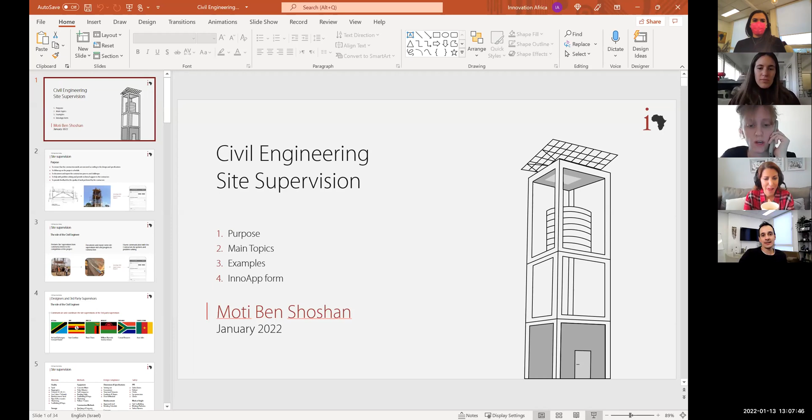Great, all right, so it's good, right? Can I just have one second, just one small fix.

Okay, so we will go through the purpose of the site supervision, main topics, examples, and then we will go through the InnoApp form.

The purpose of the site supervision is very important. It may seem obvious, but long ago Innovation Africa didn't have in-house engineers, and contractors were basically building things as they go, give or take. Now we have civil engineers and supervisors, and the purpose is to ensure that construction works are executed according to the design and specifications. We have requirements for how we want buildings done, and we need to make sure contractors are following it. Of course, we need to check that contractors are following the schedule, which is very important because we need to complete a lot of projects in one year. Another very important thing is to document.

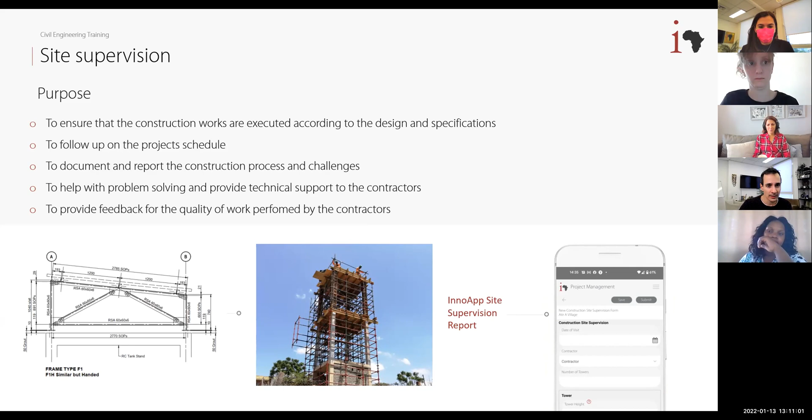So the role of the civil engineer or site supervisor is to perform site supervision from the commencement to the completion of the project, from the moment the contractor starts work on field until the end of project completion. As we said, document and report everything, and have fluid communication with the contractors for updates and problem solving.

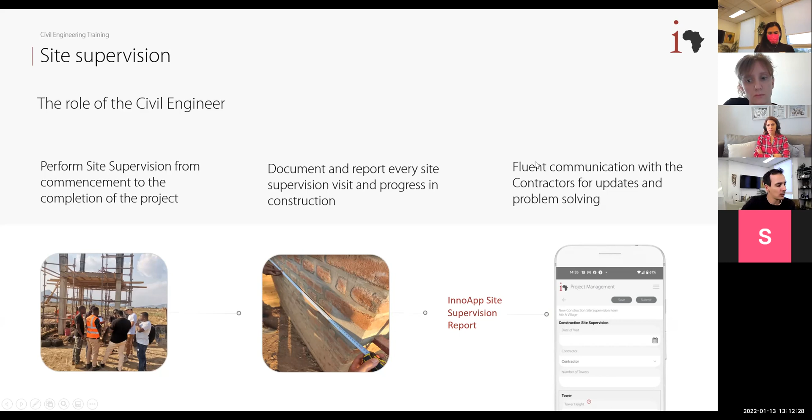This fluent communication is very important, because our team cannot be on site 100% of the time. We're not staying with the contractor all day long—we visit sites maybe once a week. But that doesn't mean we can't keep in touch. If we're not on the field, we can still call them, ask what they're doing today, how things are going, make sure they're working. We can also use our trainees to do it—take their number, call them, ask if they worked today, what was happening on site, and so on.

Another task is to coordinate and communicate with the third-party supervision. Our Ivan, Brian Chuto, Conrad, Jean Jules, all these people need to know when they come to the site, when the critical stages are, when they're going to be ready, and our team needs to prepare the contractor for the site supervision of the third-party consultants.

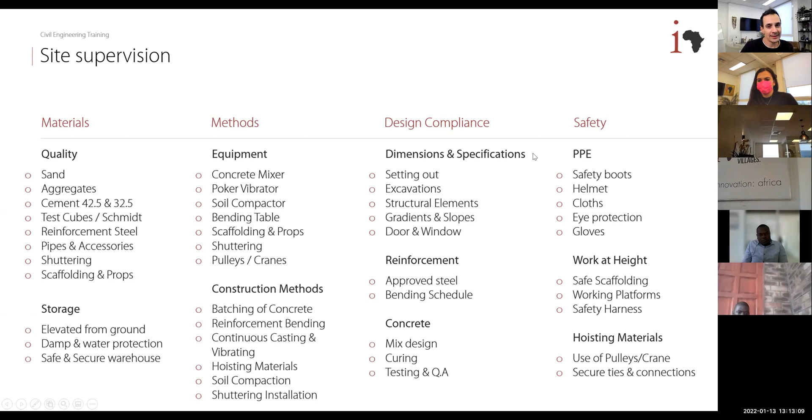This slide is very important. I recommend our civil engineers take a print screen, as it summarizes in bullet points the major topics we need to check and be aware of during site supervision. We have the materials topic: quality of materials, aggregates, cement, reinforcement steel, and storage, which we talked about earlier. The methods topic covers the methods of work, whether they're using the concrete mixer, the poker vibrator, and so on. Design compliance means making sure they work according to specification and our designs. And safety means checking that our trainees use PPE equipment, work at height properly, as Shalom mentioned before, and so on.

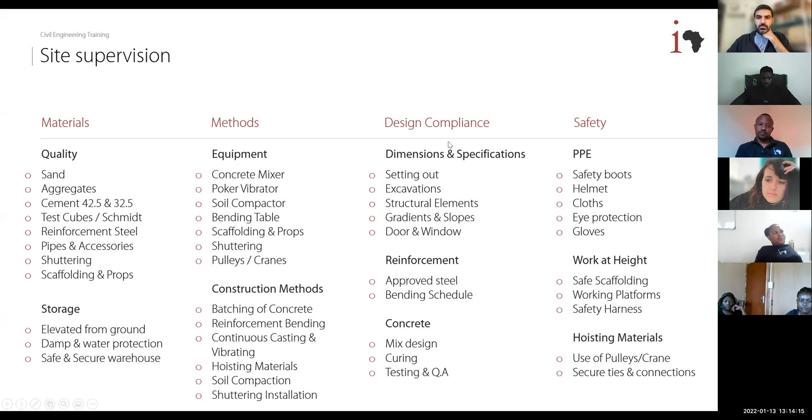The last topic, not shown here but in the next slide, is the schedule. It's also a very important aspect we need to be aware of. On the right hand side we see an example of a schedule submitted by a contractor in Biwi. Our team needs to know what is planned ahead to make sure the contractor is on track.

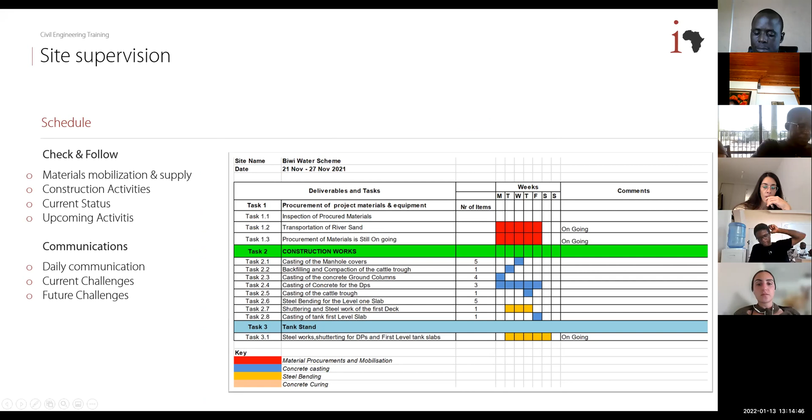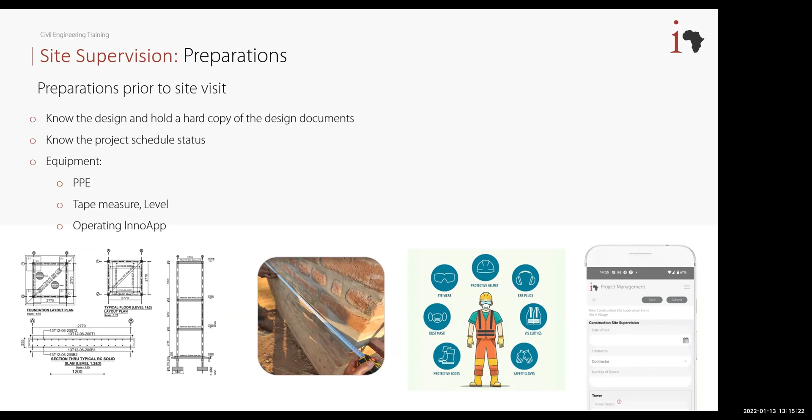Another point I want to mention is based on visits we had where I went to the site with our teams, and we've discussed this a lot in the past, but I want to mention it again. Our teams come out of their office from the central city where they stay - whether it's Mbale or another city - and drive 2 or 3 hours to the village to do site supervision. You make a lot of effort to get there.

So we need to make sure we are prepared when we go to the site. Preparations prior to the site visit: make sure you know the design and have a hard copy of the design documents, so if needed, when you're in the field, you can open the drawing, check the specification, and provide answers.

Know the project schedule status. So if I went to the site this week and saw they're working on foundations, when I go to the same site in two weeks or the next week, I need to know what to expect - are they doing the stub columns, are they doing the slab floor?

And of course, bring the equipment you need - PPE, tape measure, level - and be prepared with the InnoApp, because when you go to the field you probably don't have the best internet connection. So maybe at the beginning of each day, make sure the app is synchronized and everything is ready to be used on the field.

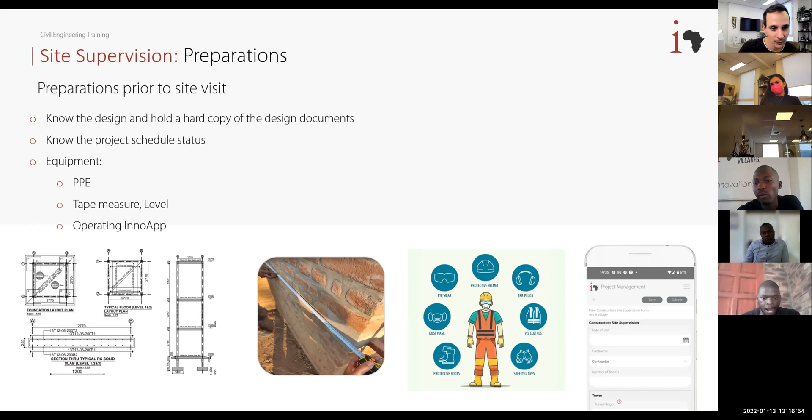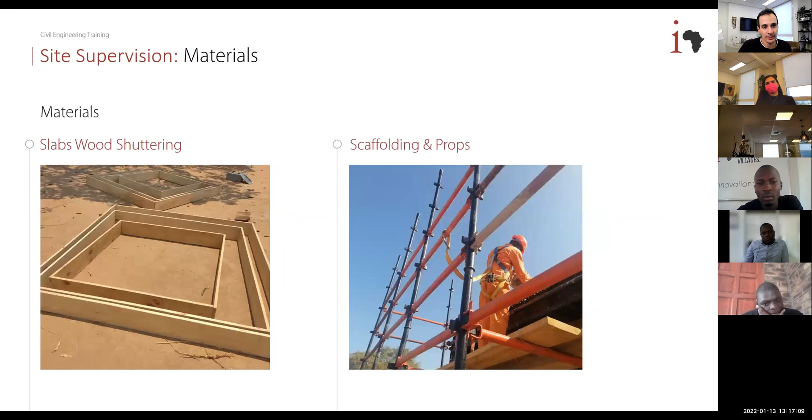We've gone through these slides already, so I'll skip through to make sure the materials are clean, pure, and well stored. We talked about the equipment and the methods of work already. The mix design - most of you know we have a specific mix design for how to create and mix our concrete, so please remind yourselves of our mixture design. See page 17 in the construction manual for further details - all the recipe we have for our concrete - and make sure you know what to expect when the contractor is mixing concrete on site.

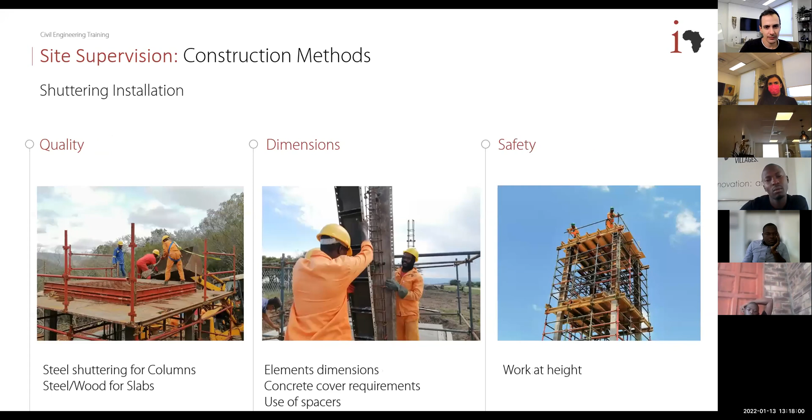We talked about the bending schedule in Shalom's video. Now for safety - you can see they are lifting the solar panels in a way that will not harm the equipment, and it's safe work. This is a good example of hoisting material.

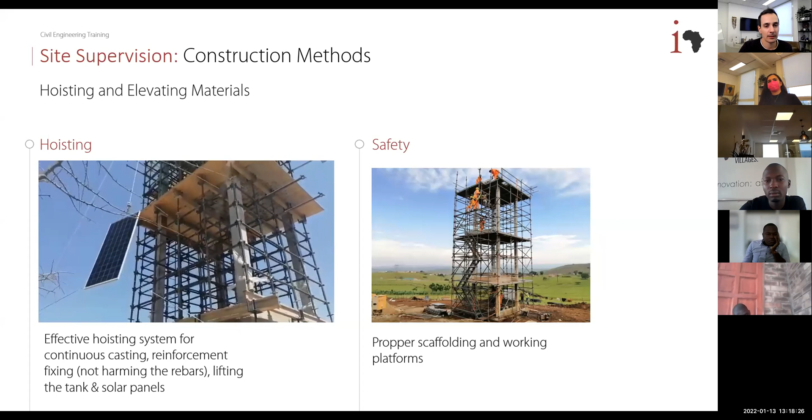We talked about the brickworks and the plastering. All those slides I'm running through are things that we need to check when we go on site. Of course, the curing that we talked a lot about.

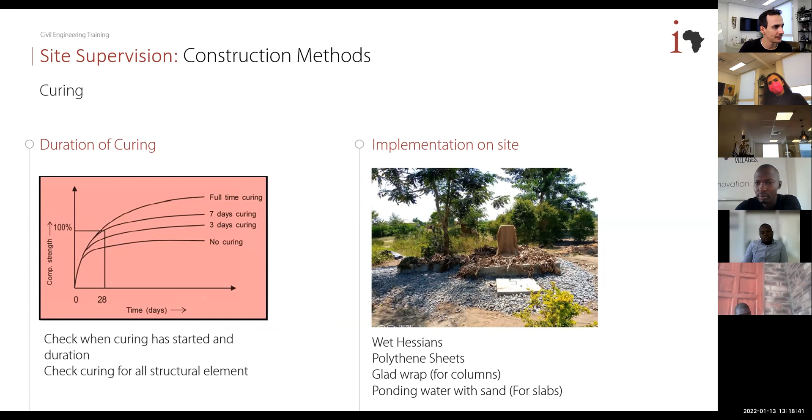Now we are going into some examples. I will stay on these slides. We're going to see actual things that we need to check. I must say it's not everything, it's some of the things that we need to check, but they are very important.

So most of our structures, the first thing that we need to check are general dimensions. If I'm seeing columns, use the tape measure to see that the columns are 23 centimeters by 23 centimeters. This is the most popular dimension that we use in our designs. I think only in one or two countries are we doing 25 by 25, but those are the dimensions. Once you do it a lot, you will already know what you expect to see, you don't even need to open the drawings, you know the dimensions of your columns. Use the bubble level to check the verticality of the columns, if they are straight.

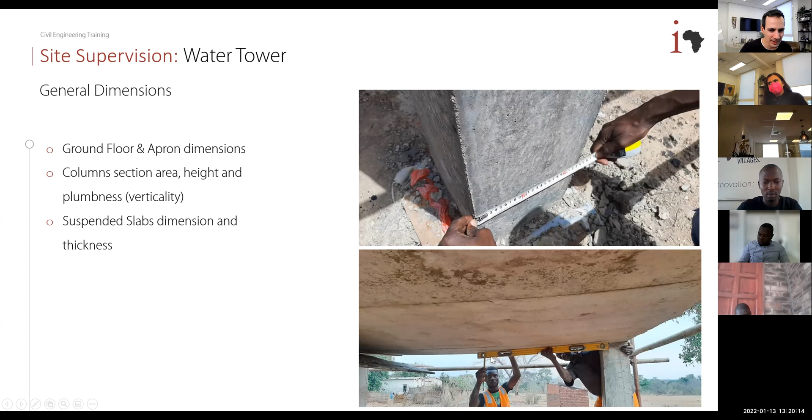Check the thickness of the slabs and so on. Here in the bottom picture from Zambia, we are seeing that the slab is bent, has some kind of belly, and our engineer checked if the slope is okay or it's very severe, and he used the level here.

The new thing that we discussed are the drainage slopes for the slabs, to make sure that the water is not standing on our slabs. So check if the contractor is implementing those things. Pipe clamping.

This thing is always reoccurring. The pipes coming out from the tank, a lot of times they are just connected in 2 points, once on the tank and another point on the ground. And then when you come and just play around with the pipe a little bit, shaking it, it's all shaky. So imagine what happens with high winds, or just kids playing with the pipes, they can easily take it out. So we need to make sure the contractor is clamping and fixing the pipes to the structure. They use clamps, drill holes, connect it to the slabs or to the column, make sure the pipes are fixed and not moving and wobbling.

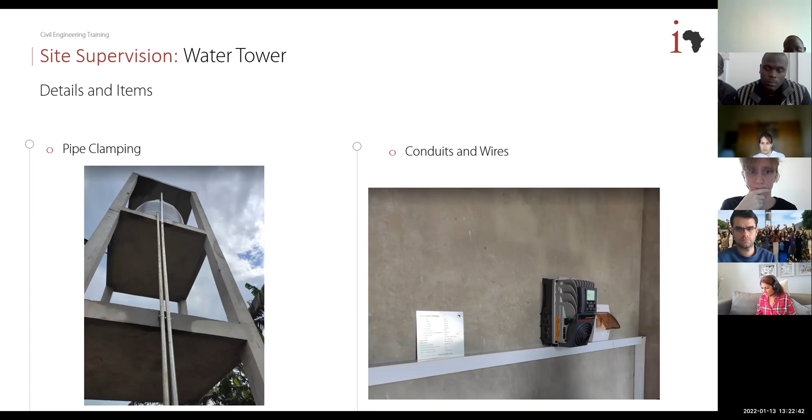Another thing is the conduits and wires. See in this picture how beautifully the conduits are running inside the pump room. No exposed wires, no exposed electricity, everything is neat and nice. Another important thing: if we need to run wires or pipes from our electrical appliances and water systems, we are not doing it through structural elements. Structural elements are columns, beams, and slabs - those elements hold the structure together. We don't want to drill through them. The only place we can drill to run systems is through the brick wall.

The doors and windows, Shalom already mentioned. I saw a lot of places where you stand and the door and window looks like they're painted really nice. But if you climb or take a chair, you will see that on the top and on hidden places, the paint is not complete and there are some stains of rust. So please make sure that on the handover of the project, when they are doing the painting of the door and window, everything is covered perfectly, because one stain now will grow to a lot of rust in a matter of 1 or 2 years.

Another item that we need to check is the locks and cabinets - see that they are working, that they are safe, and they are fulfilling their function.

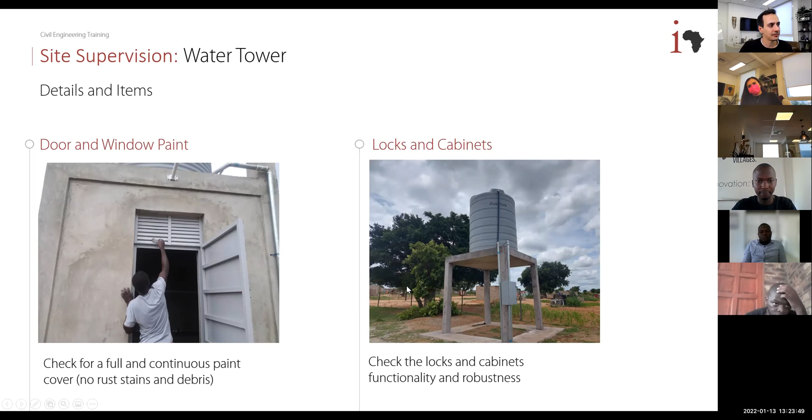I'm really running through these slides because I want to have some time to go through the innovation app.

Important thing with the taps - I know that in a lot of countries we discuss this issue. Our drainage channels need to drain water, right? So we need to make sure they are sloped, that the water will flow with gravity to the soak pit. And it's not always the case - a lot of times you see water ponding into the soak pit, into the tap stand.

So in the new design, we are specifying the direction of the slopes - the water should flow from the surface through the channels to the soak pit. When you go on site, use the level to check that the slopes are correct. The Uganda team can tell you that we did this a lot in Uganda, checking all the slopes, and we saw that in some cases the contractors were not even aware of this issue. It seems like a small issue, but it's very important also for the sustainability of the structure.

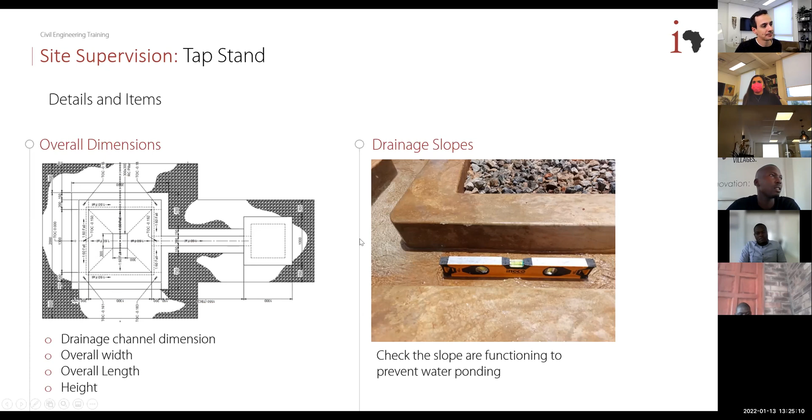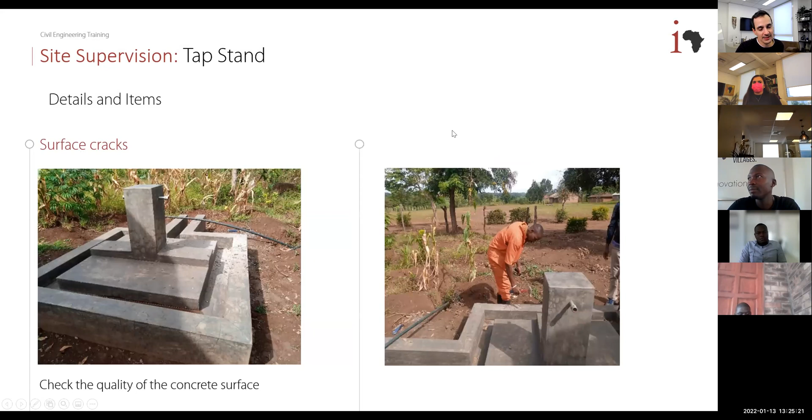We talked about the metal screen and the aggregates. Surface cracks, we talked about it with the curing.

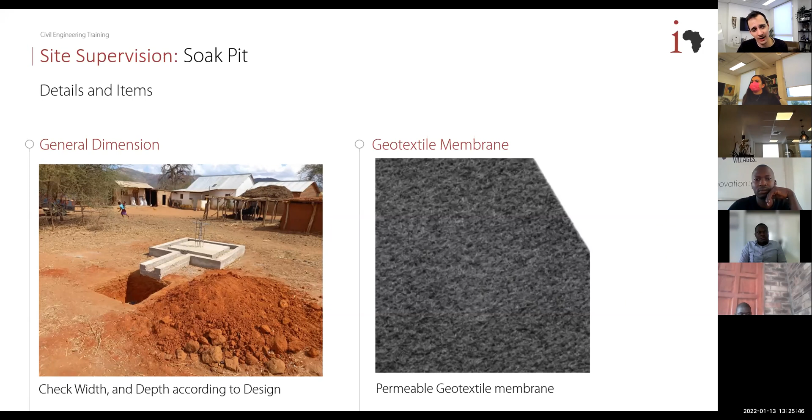Okay, so for the soak pit, again, if you have the chance to see the excavations, check the general dimensions to see that the width is 1 meter by 1 meter, the depth is at least 1 meter. See if they are using the geotextile membrane, because once they are covering the soak pit, it's very hard to tell and to know what was actually done.

We have the concrete cover. Make sure that you have 2 metal handles casted in, and the cover is overlapping and covering the whole area.

Same for the cattle trough. This is a beautiful picture of cattle trough. Look at the nice finish, the smooth finish of the concrete, the well done reinforced slab. Make sure that they have these openings in the center wall, so water can flow from one chamber to another.

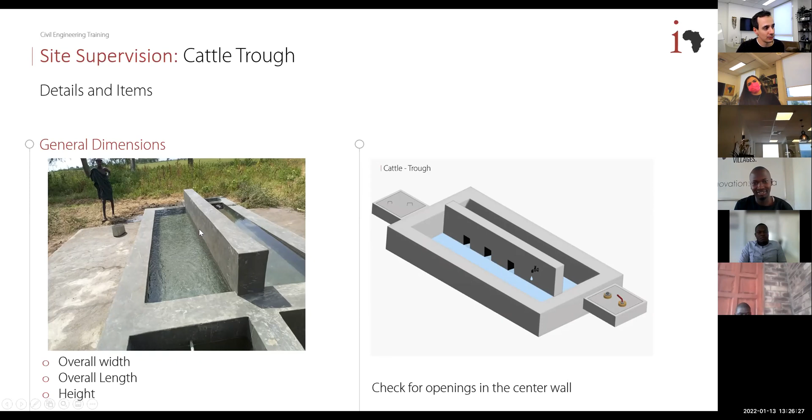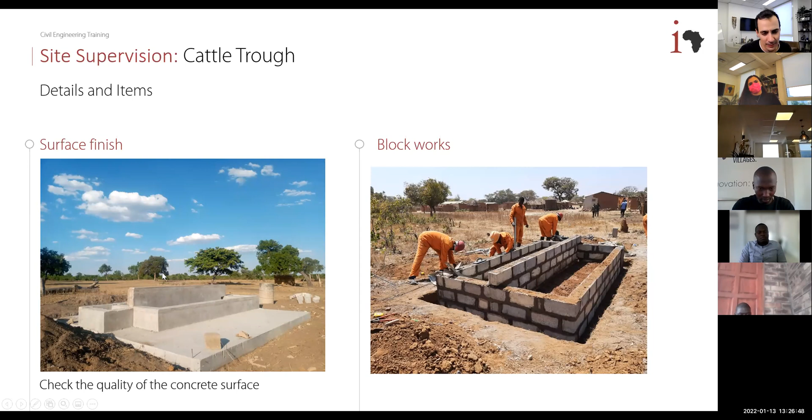And of course, if you see cattle trough in construction, so if you see the block works, you can check the quality of the block works. And if you see the finishes, same thing. Check the finishes of the concrete, check that the curing is being done properly.

Okay, we ran through the site supervision really quick. Now I want to show you the innovation app form. I don't think that they have questions.

Yeah, Raymond is asking a question. Raymond from Malawi is asking about clarification for drilling through block works and not through concrete. When we want to clamp the GI, we need to drill through concrete.

Yes, of course. Clamping the pipes is through the structural elements, but this is really small drills for bolts, just for clamping. And we also drill into the columns when we are putting the guardrails for the tank slab. It's the same drillings. It's not affecting the structural elements so much. What I mean is to drill big holes to run pipes through it. So we saw projects where pipes were drilled, were run through beams or through slabs. First of all, it weakens the slab or the beam. Second of all, water can come in gradually through this drill, and then damage the reinforcement steel and damage the structural element. Hope that helped.

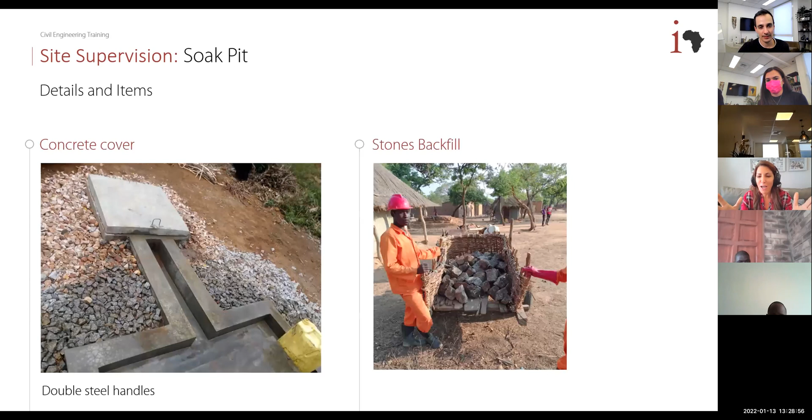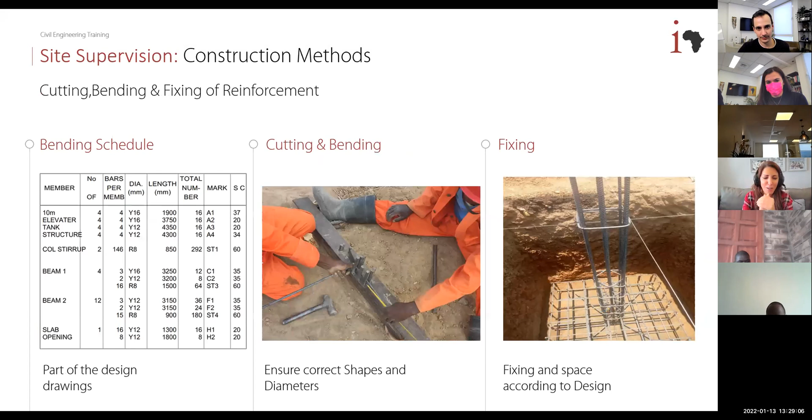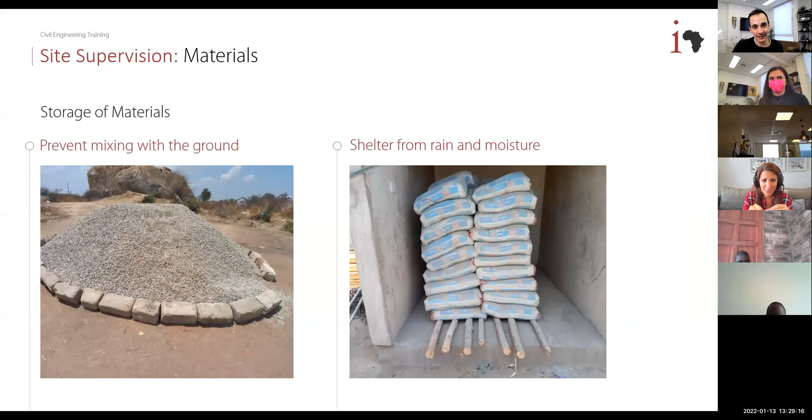Yes. Is it sand, cement, aggregate? Can you teach me how it works specifically when it comes to the concrete mixer of 400 liter, which is what we're asking our contractors to use, those kind of large concrete mixer. Can you tell me how does it work? Yes, so of course, the components of concrete are sand, aggregate, cement, and water. The ratio 1:2:2 is the volume ratio, for 1 unit of cement, 2 units of sand, 2 units of aggregates. The water is calculated differently as water cement ratio, which is usually 0.5, 0.55.

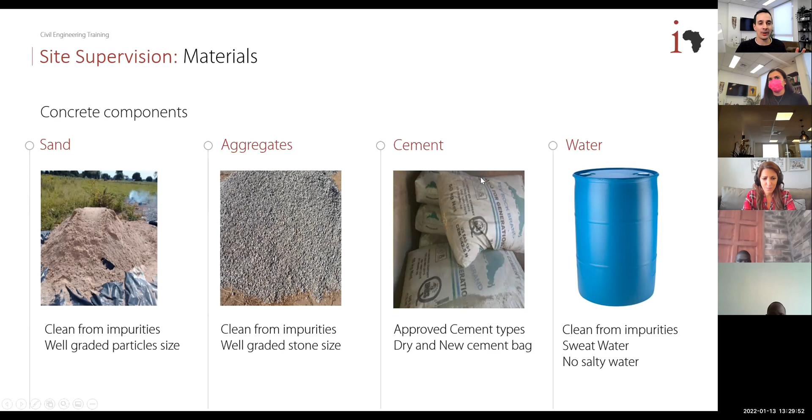So we have the table of mixing the concrete. The table is specifying, where is it? Yeah, in the construction manual. The table is specifying how we use the gauge boxes for different volumes of mixers. But the ratio is always maintained the same to achieve the right concrete mixture. So 1 unit of cement equals 2 units of aggregate and also 2 units of sand. What about the water? The water ratio of water to cement is 0.55. And they use liters, with buckets.

Now, it's a very good point that you ask about the water, because most of the time contractors tend to add a little bit more water because it makes the concrete more workable. Imagine that you want to cast something and it's like a paste, it's sluggish, so it's really hard to work with it. And if you add water, it's more fluid and it's more workable. So sometimes contractors used to put more water than needed just to make the concrete workable. But if they use more water than needed, they can compromise the final strength of concrete.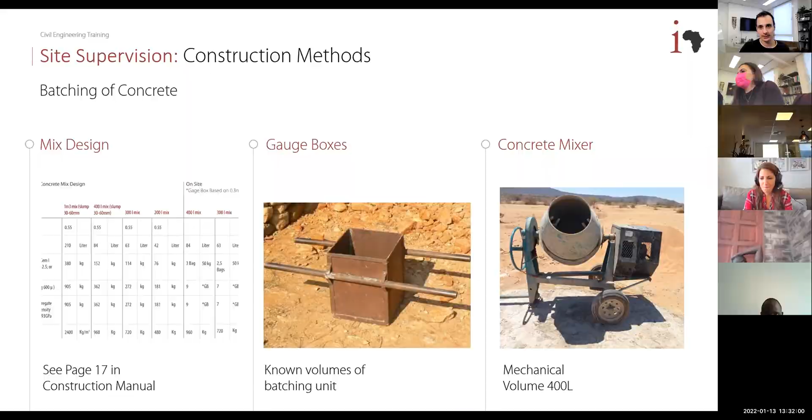Stop sharing and now. Sorry, Moti, can we just jump in here? I want to just address one question from Raymond, who said he needs some clarification on drilling. It is recommended to drill on block work and not... We talked about it, yeah. Ah, okay, sorry. Thanks. Sorry. Bye.

Now I need Sharon's help. I'm just thinking if it's Jeremy... it's gonna be too confusing to see it this way. Moti, if you need a backup, let me know. Sorry, just one second. Do we need this later on? Oh good, Jeremy's there. No, we're done with this.

Beautiful. Okay, thank you, Jeremy.

All right, so I'm very, very happy to have gotten to this point, that I'm able to show you the form of the site supervision. A lot of thanks to Jeremy, to Tara, all the people who worked very hard to make it happen. So the aim of this is simple: to make our life easier and more effective.

Okay, so up until today, we had checklists, we had things that you wrote on notebooks, things that you wrote on WhatsApp, and it was all scattered data. So the idea of the form in the innovation app is to have all the data standardized in one way and directly connected to the database.

So all your site visits, all your observations will be uploaded directly to the database, and we will have access to see it. We will have access to filter any data that we want. So maybe at the beginning there will be a bit of a learning curve, but I'm pretty sure that once you start using it, it will be easier for you.

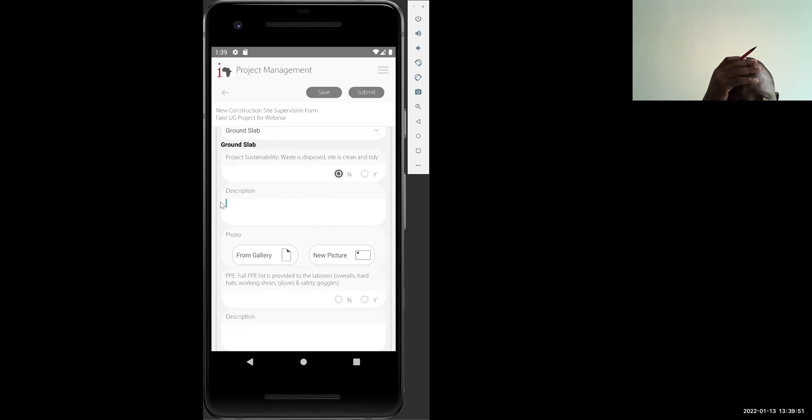Now, the pictures are very important because pictures give us a really good concept of what's happening on site. And the pictures for engineering are much different from the pictures we take for the community. We don't need to see beautiful smiles and nice faces in the engineering pictures. You want to take a picture that tells the story the best way in the engineering manner. If it's the reinforcement, take a close picture so we can see if the spacing is correct or not, or if something is wrong.

And Moti, can I ask you a question here? Let's say they see that it is not clean or the cement is not well stored. Of course they should report it, but at the same time they should be acting on it, right? They should talk with the contractor. It's not just for us to know, it's for them to share the data, but truly it is more for them than anything else, because when they go back the week after, they can see what happened the week before and if there are any improvements. So they should be acting. If they see anything wrong, they should definitely speak with the contractor about it. Exactly, very good point.

So the forms are also helping us to follow up. When we see those things, we talk to the contractor and we're able to see next week if they improved. We also have the PPE question, which is a returning question, and a question on whether the materials are adequately stored.

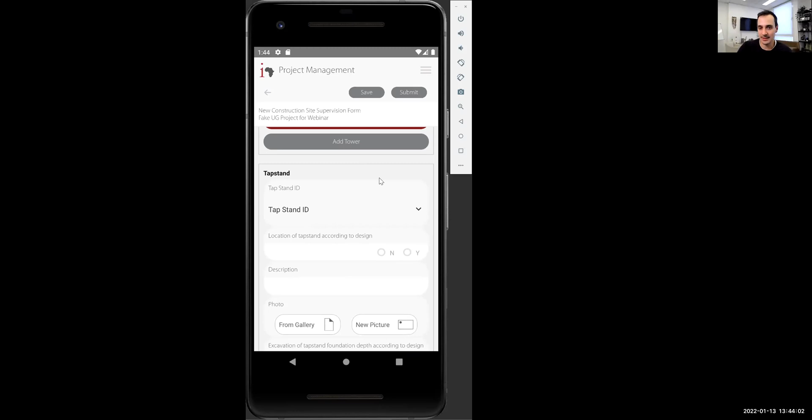Now, the tap stands are a little bit different because most of the time we're not going to fill in each and every tap stand, since we know the contractor is building them in bunches, in clusters. They're doing, let's say, 3 or 4 tap stands on the same day. So here you will write...

Yes, here's the tap stand section, so you can add a few of them together, not just choose only one. If you choose tap stand number 2, 3, and 4 together, everything you fill in after that is relevant for those tap stands you mentioned. Then you check that the location of the tap stand is according to design, according to the EPANET.

And then the questions are again relevant for the tap stands: the foundation of the tap stands, the shuttering dimension, the reinforcement, and so on. So you fill it in.

And add pictures. Now about adding pictures, you don't need to add a picture for each and every question. If things are in order, and you just click yes, let's say yes they did the curing properly, and it's just another curing you've seen millions of times before, you don't need to add a picture. Usually the pictures will be for unusual things, for things that are not in order. But it's also nice if you can take an overall picture sometimes, just to see the whole tower or the tap stands all together, even if everything is okay.

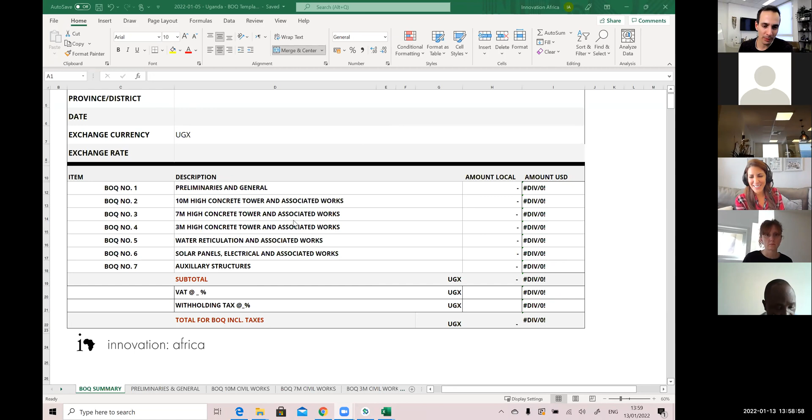Moti, just as a reminder, on Monday you're going to do a BOQ workshop with the civil engineers. Is that true? Yes, we will have plenty of time to discuss the drawings and the BOQ in a workshop. We will have some kind of exercise, some open discussion, not a presentation vibe, more like I want you to see the drawings and calculate quantities into the BOQ, and we'll do it on Monday.

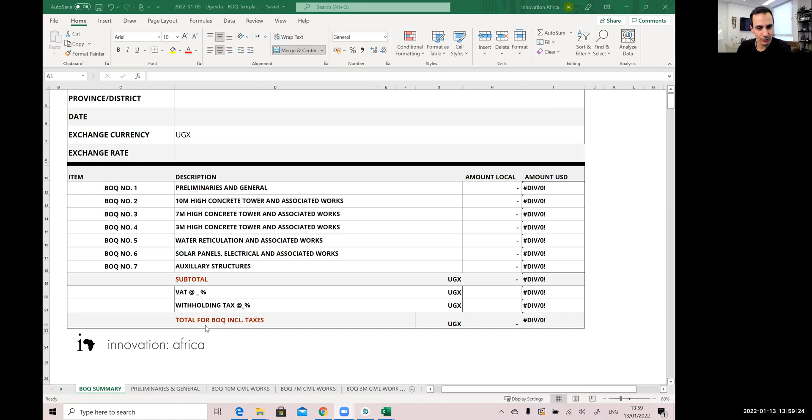So what I'm going to show you now is a template BOQ from Uganda. It's very similar to other countries. The only thing I want to show you is that we have the tabs here below.

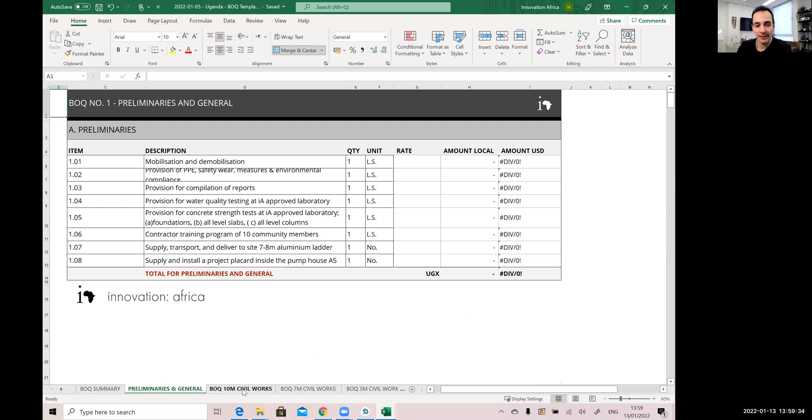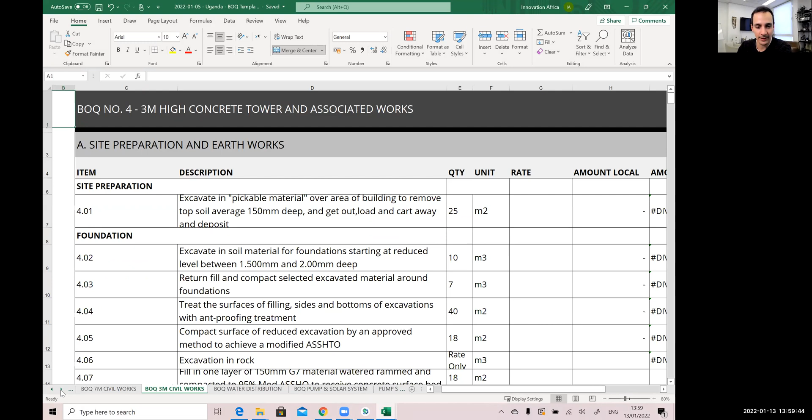We have tabs for preliminaries and general, and tabs for 10-meter tower, 7-meter tower, and 3-meter tower. We have tabs about water departments and electrical departments that I'm not going to talk about, and we have a tab for auxiliary structures. The auxiliary structures are the tap stands and the cattle trough.

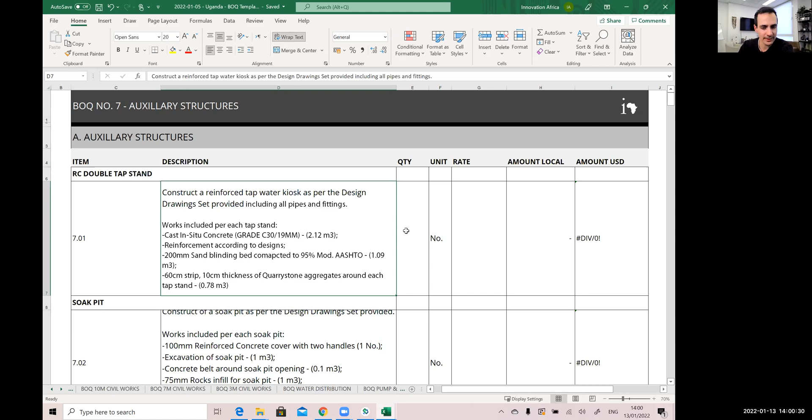Now, the places we need to modify - for example, if we have a project with only one tower of 10 meter, we need to make sure we are not giving the contractor the 7-meter and 3-meter tab. And if we go to the auxiliary structures tab, we need to make sure the quantity here is correct. If we have 8 taps, 10 taps, we need to verify the quantity is correct.

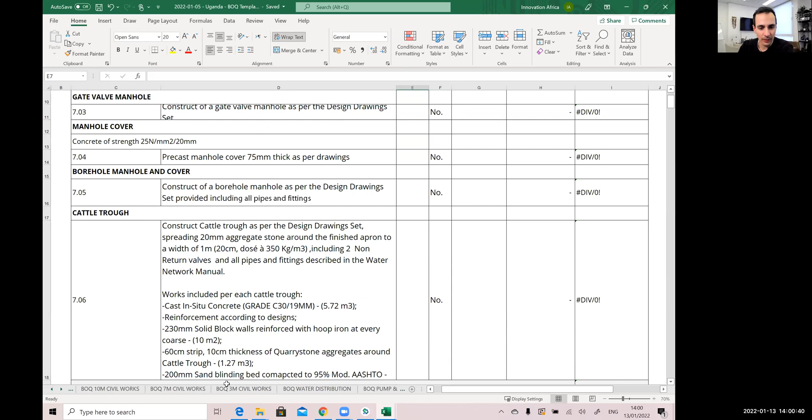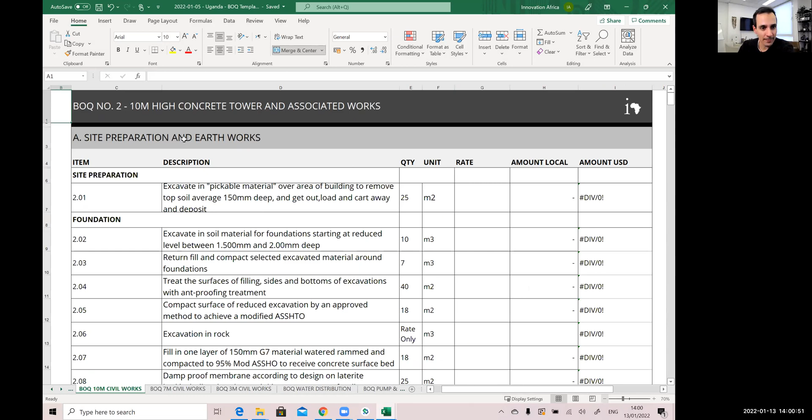And for the towers, we have a few more things I want to talk about quickly. We have the preparation works of the foundations and earthworks. This also includes the damp-proof membrane here.

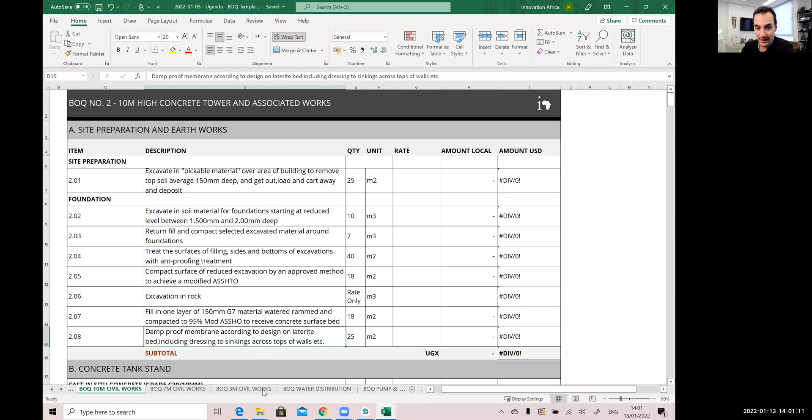If you see clause 2.08, we don't have a damp-proof membrane, for example, in the tank stand of a 3-meter tower. Sometimes we have it, sometimes we don't. So if we don't have a pump room in our project, and we have a 7-meter or 3-meter tower without the pump room, we need to go through the items and make sure only the relevant items are included. For example, the damp-proof membrane will not be there.

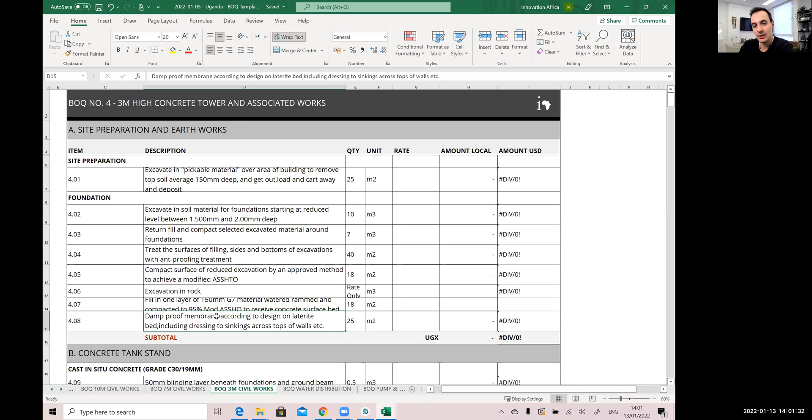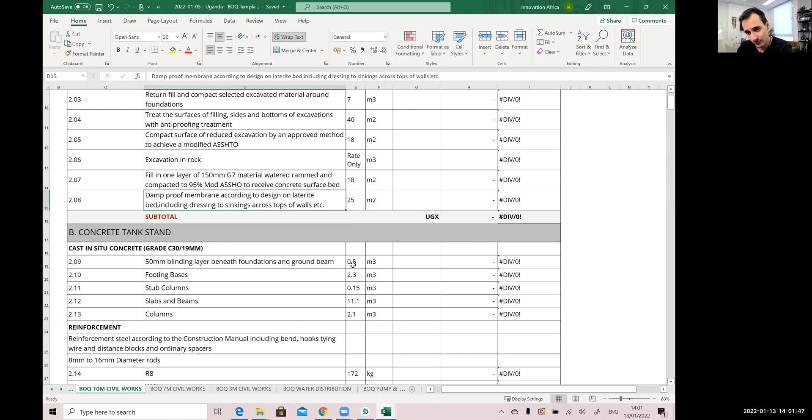Now, the quantities of the concrete are quite fixed - calculated according to our designs, of course you're welcome to check it. The quantities of the reinforcement and the steels are also calculated according to our designs.

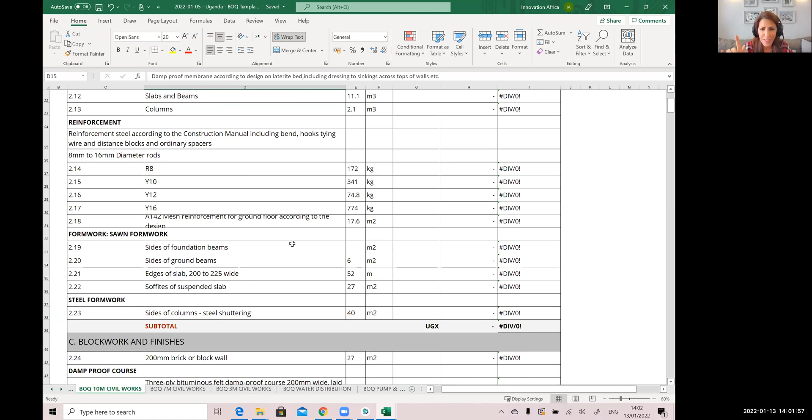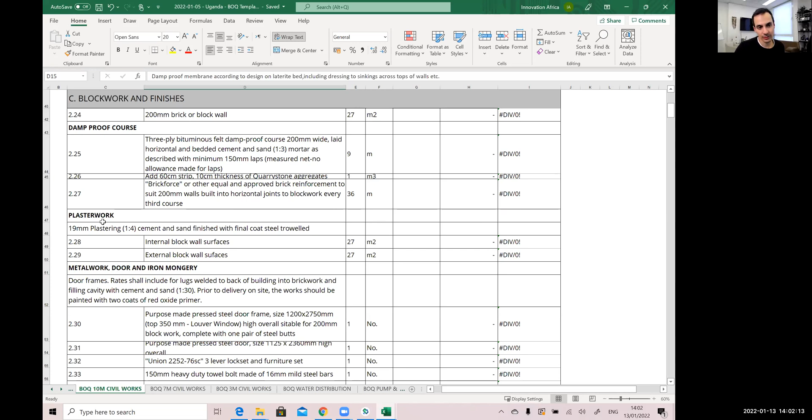Another thing that can be modified is all the parts relating to block works. As I said, if we're not having a pump room in some specific tower, we need to make sure we take out the plaster works or the block works.

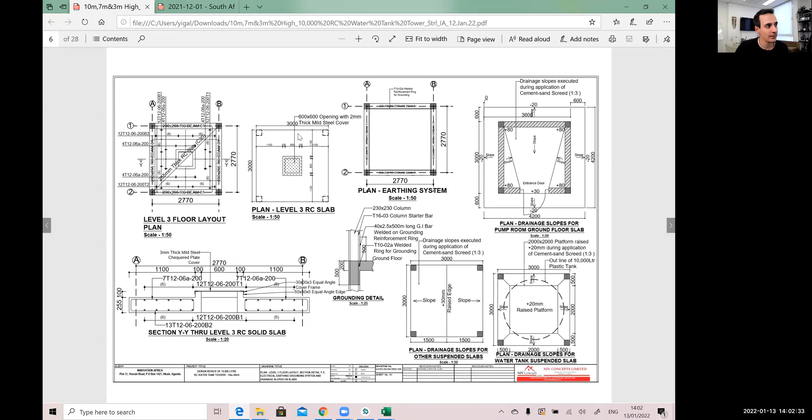Each tower has a mounting structure - mounting structure for solar panels. It's an official item now, and I want to show you how it looks like. For example, this is the Uganda design. Let me scroll.

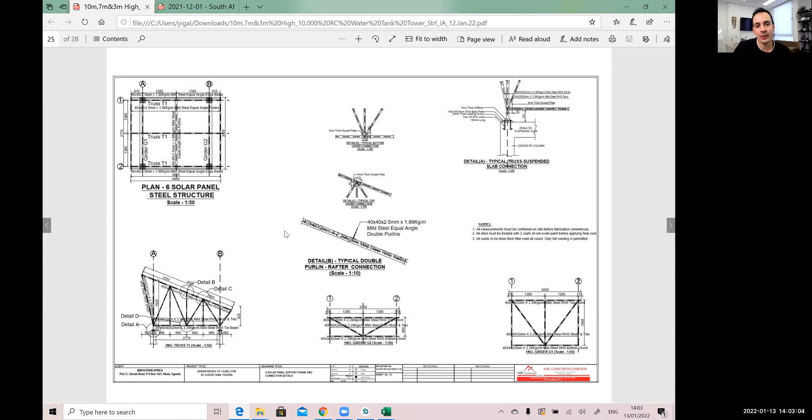So now we have standard drawings for solar panels, for the mounting structure. Up until today, the contractors were welding and improvising whatever structures they wanted. Now we have a standard design - this is how it looks like. Take some time to have a look at it.

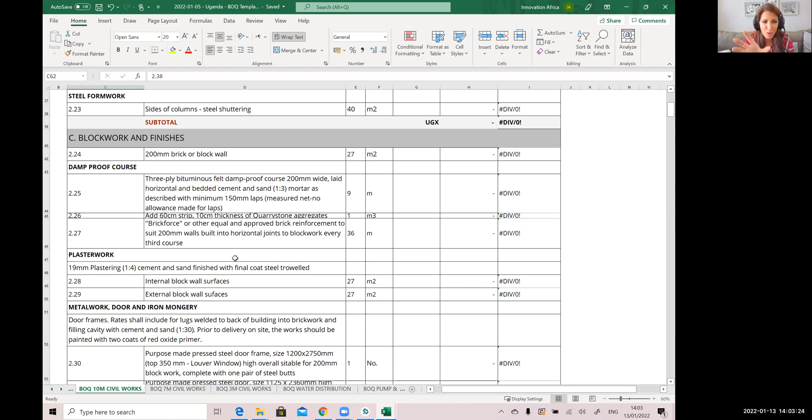Okay, Moti, can I ask you a question regarding that page? If you can go back up and show us again the numbers for concrete and steel work. Now, am I correct in saying that the only reason we have different BOQs per country is because the numbers of concrete and reinforcement requirement differ from one country to the other, just because of the drawings we received from the in-house designer or third-party supervisor?

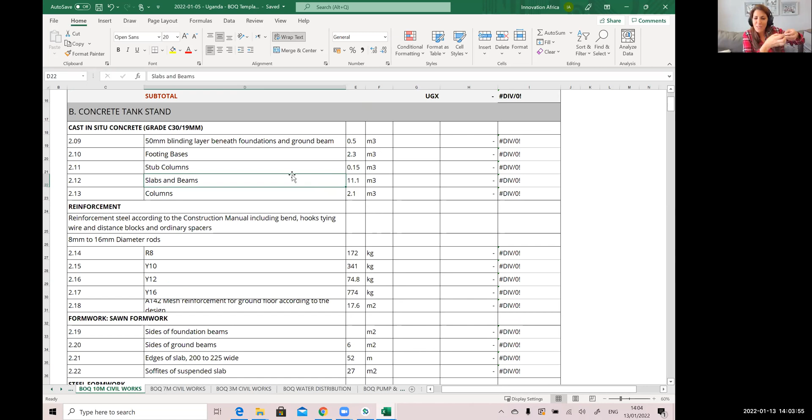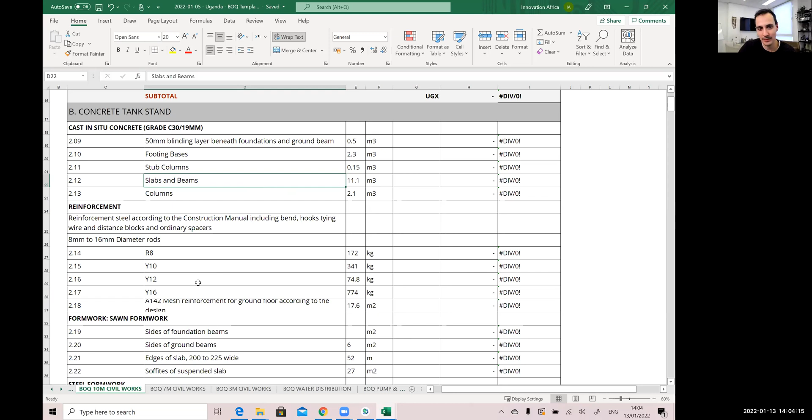Because in every country, the requirement is a bit different on how much steel and how much concrete we should be using. Yes, it is correct. And I have actually another BOQ here. I chose to show Uganda BOQ and South Africa BOQ because of their differences that you just mentioned.

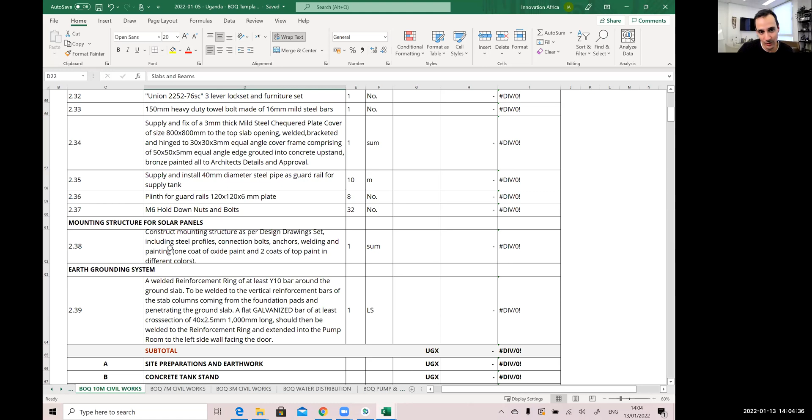So we have the mounting structure and the earth grounding system. Those items also sometimes should be included and sometimes not. We need to make sure that all of the items are relevant for our project. And again, on Monday, we will have some time to dive into it.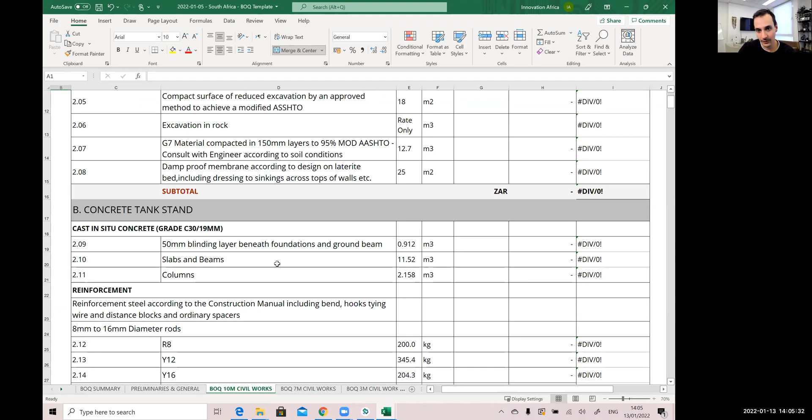Also each country uses slightly different types of bending schedules, with minor differences according to local practices. So these sections are modified according to the design of each country. This is an example of one difference for the foundations, but some structural elements might also be a little bit different between the countries.

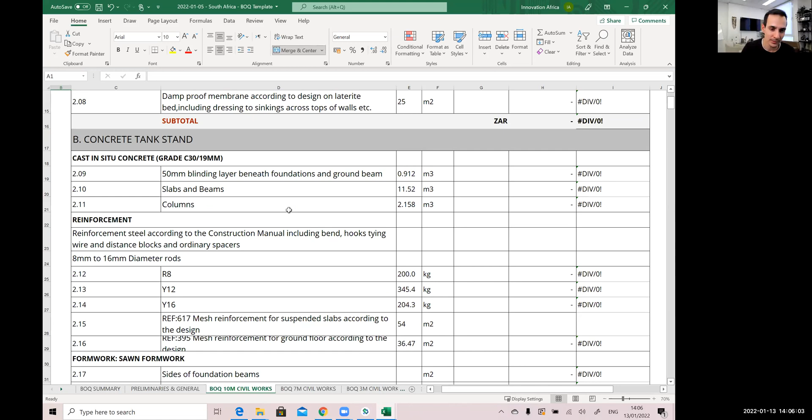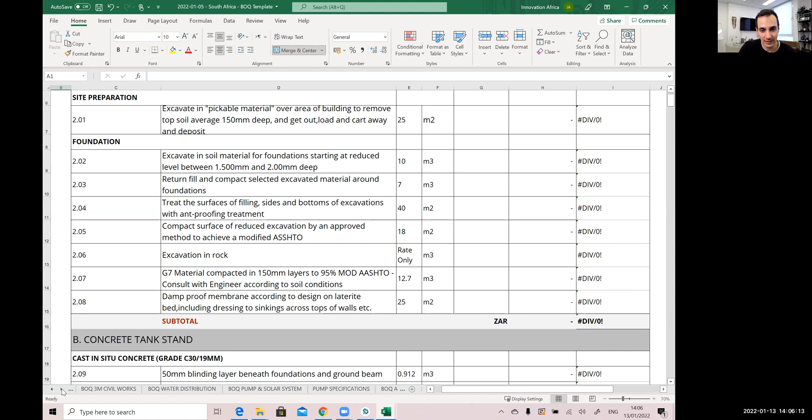I think we are generally done with the BOQ and we will dive into it on Monday. I want to show you one more thing.

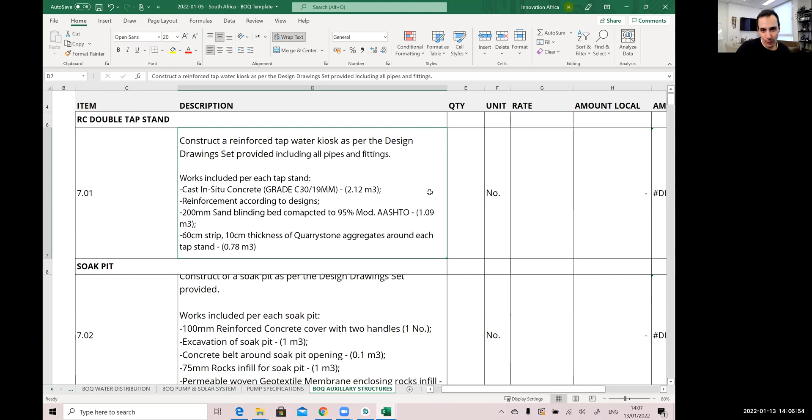In the auxiliary structures, in the past there were a lot of questions about the reinforcement of the tap stands and the cattle trough, and what is included and what's not. So now we have the tap stand, the cattle trough, and the soak pit as a lump sum item like before, but we are specifying the quantities here. The quantities are specified for one tap stand - the volume of concrete and so on is specified for one tap stand, one soak pit, or one cattle trough.

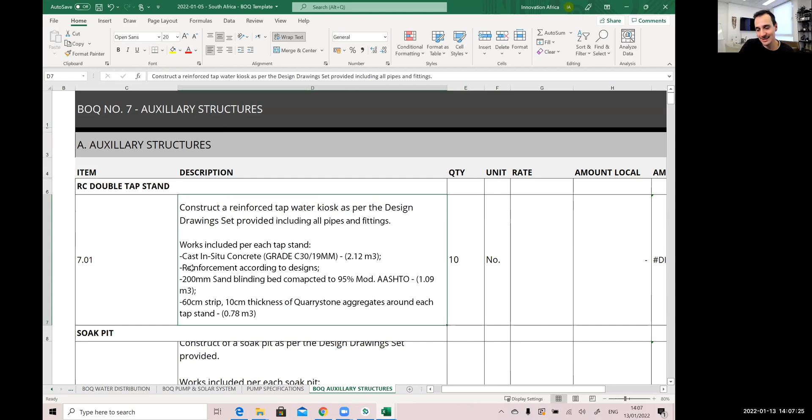Then when the contractor sees that you have, let's say, 10, he needs to make sure that he understands, and you need to make sure he understands, that the quantity of 10 needs to be multiplied by the quantities of one tap stand. We also added that the reinforcement is according to design and is also included in the pricing of one tap stand.

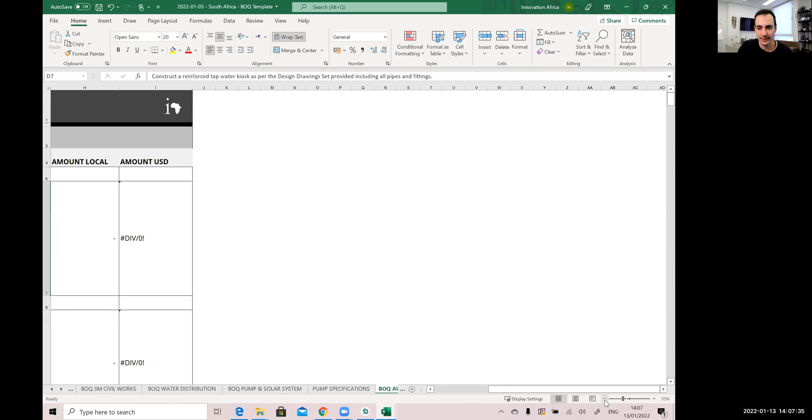Let's see if we have any questions. We can talk a lot more about the BOQ, but we don't have much time to do it now, and we will do it on Monday.

Yeah, I think there's quite a few questions specifically about getting into the sections and really talking about the different line items. So if we need to put that off for...

Yeah, so I see Gabby is asking about the BOQ negotiations and pricing. I think we will discuss it on Monday a little bit - the pricing attitude and the negotiation a little bit. We will talk about it on Monday.

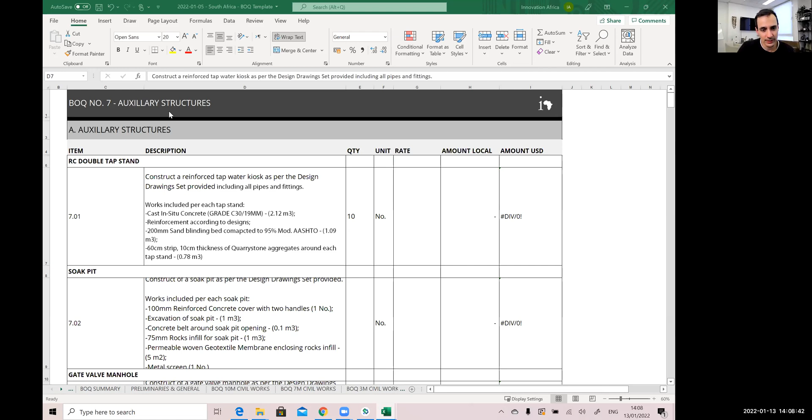Josiane asking about the curing. So no, we are not including the curing in the BOQ. It's considered as the equipment of the contractor - things that he needs to use as part of the works. When we price concrete, we price the work of concrete, the materials, the curing. So we don't go into this resolution.

Chisomo is asking, in case of a 3-meter tank tower that has no pump room, we need details for the manhole that houses the manifold. Yes, so...

Chisomo, you had this type of project in Malawi recently. Now we have two standard types of manholes in the design: the valve manhole and the borehole manhole. If we need any other special manhole, this is the 10% that's different from our standard, and we need to attend to it specifically.

But as I said before, sometimes we have tank stands without a pump room. In this case, we need to make sure that the BOQ doesn't have the plastering items and the block works items and so on.

Let's see if we can answer. In the file, some things were asked. Where is it? Yeah.